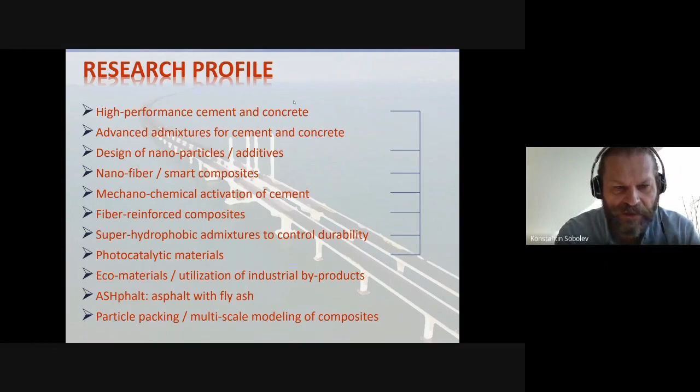Today we'll discuss concrete, and most probably you've seen similar slides earlier today. I just like to briefly mention that we all deal with concrete because it is such a wonderful material, and it is widely used in civil and transportation infrastructure.

Because concrete is such a widely used material, the production and use of Portland cement is also considerably high, and we all are dealing with improvement of this material, because even a small improvement of concrete performance can make a significant impact on environment and significant impact on economics.

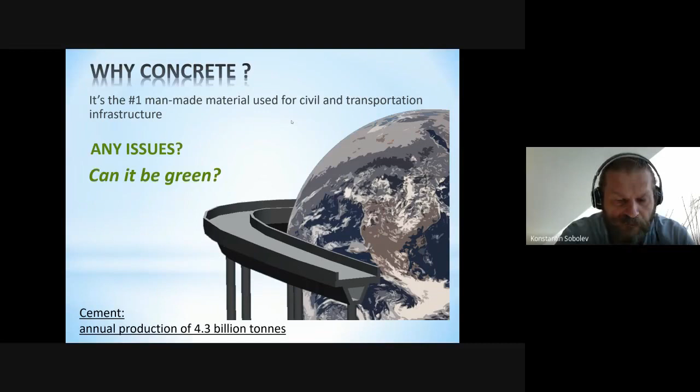The question always comes: do we have any issues with concrete? It's widely used and looks like a convenient material of choice for many applications, but do we have any issues really? Do we know how to use it effectively, and can we do it better? Also, can we produce concrete using green technology, and can we really focus on making it environmentally friendly?

If we look at this chart, very popular in the United States - every year the American Society of Civil Engineers does a study, and this is, I believe, the latest. Maybe there is a new one published recently, but I'm not aware of it. I've been tracking this for maybe the last 10 years at least, or more.

In the United States, our infrastructure rates higher than a D grade. I don't know if you're familiar with the grading system we have in the US - D means a failing grade. Basically, it means you cannot really graduate from your university with a D grade. You need to take the class again, or take the entire program again.

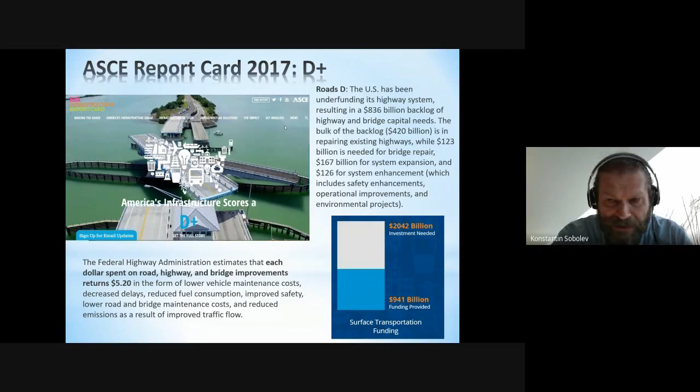So very often we feel that more money is simply required - give us funding and we will build beautiful infrastructure and fix all the problems in construction. This is the approach the Federal Highway Administration takes, thinking they can fix it if they have more money. In reality, it's most probably not sufficient to have just more funds. More knowledge is required.

Some statistics from Wisconsin - I live and work in Wisconsin, which is one of the northern, central-northern states in the United States, bordering Canada, and most probably has the coldest and toughest conditions for concrete exposure.

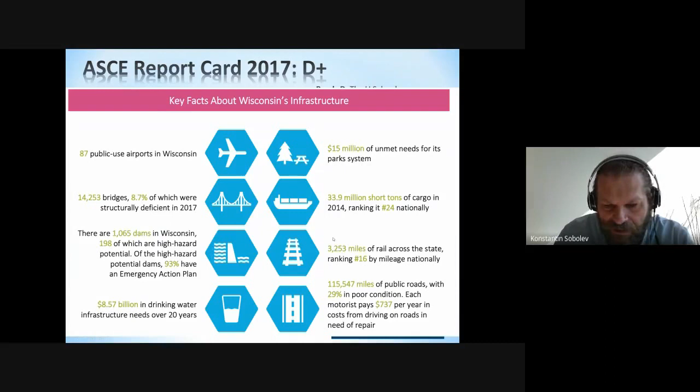You can see that bridges are about 9% structurally deficient, we have about 20% of dams structurally deficient, and if you look at public roads, 30% are in poor condition. So really, a very sad picture - we do have a problem with concrete durability.

If we want to attack concrete durability, we need to understand that concrete is a porous material, so moisture, liquids, ions, and gases can easily pass through the concrete structure if it is not designed to resist such effects.

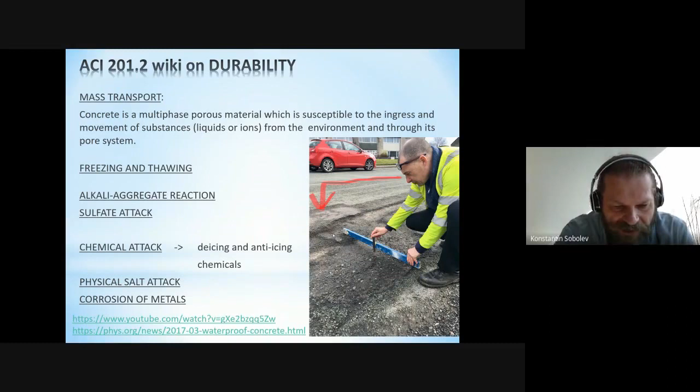As soon as concrete is wet or subjected to flows of fluids, it can be subjected to freezing and thawing failure, can fail because of alkali-aggregate reaction, sulfate attack, and chemical attack - which we often see here in Wisconsin because of use of de-icing and anti-icing chemicals, causing physical salt attack and corrosion of metals. So durability is obviously a great challenge in current state of practice, requiring a better fundamental understanding to do better work on construction sites.

The effect of water-to-cement ratio was already discussed earlier today, and we need to also understand the effect of curing. What we usually know about concrete in the lab is material perfectly cured under laboratory conditions, but in the field we often don't have adequate curing.

Curing is very important to the formation of proper capillary structure and formation of micropores rather than macropores, which are easily penetrated by fluids and cause material failure under environmental exposure. If we think about water-to-cement ratio as a key parameter, having a ratio less than 0.5 will result in better compressive strength, but more importantly, lower permeability - lower capillary porosity and lower permeability. This is our target.

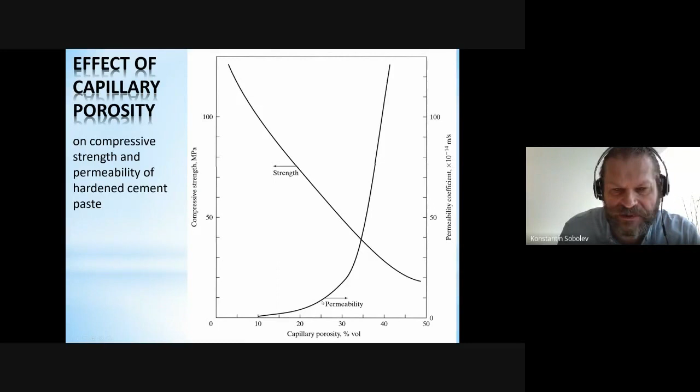Obviously, in the field, curing is a big issue. I ran this experiment back in Mexico when we had a construction project next to our university, and I observed certain temperature and humidity fluctuation. Rainy days and dry sunny days were changing, and I've seen concrete placed in a very important structure without proper curing.

I ran an experiment with my students. We had two types of concrete at 0.45 and 0.6 water to cement ratio, and we tested them at different exposure conditions. For one day, materials were cured in molds under the same conditions, but after one day they were exposed to outdoor exposure, while others were cured in the lab and subjected to moist curing.

What we would expect normally from this concrete at moist curing, if you have a high water to cement ratio, the difference between these two concrete types would be about 100 kilograms per meter cube. In order to get your design compressive strength for concrete at 0.6 water to cement ratio, you really need to produce concrete at water to cement ratio 0.45, meaning use 100 kilograms of cement more to compensate for poor job site conditions.

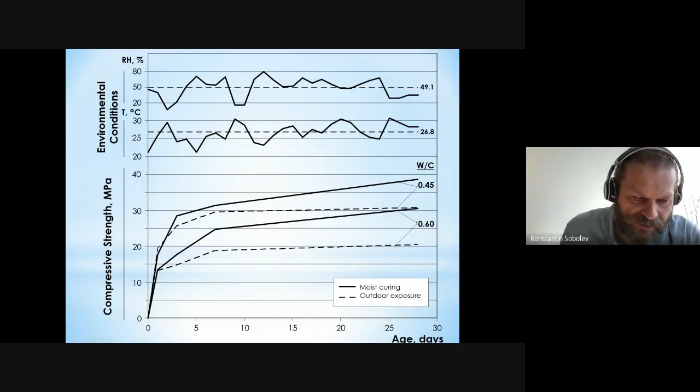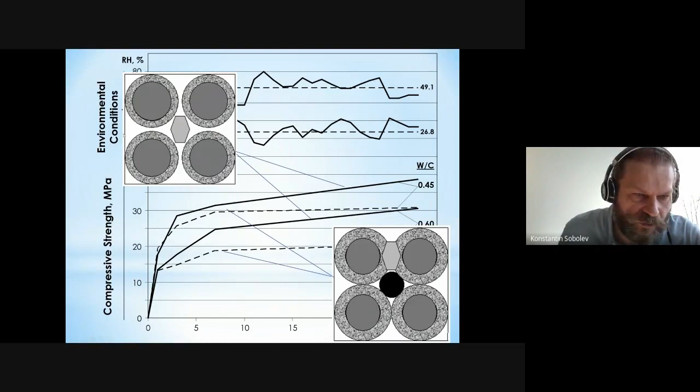Roughly, you can see you lose about 10 megapascal of your compressive strength under such conditions. This is because of rapid drying and poor microstructure, while under perfect moist curing conditions, you form a very beneficial microstructure.

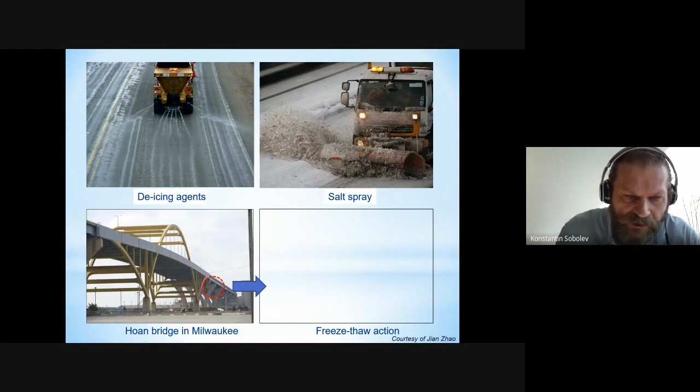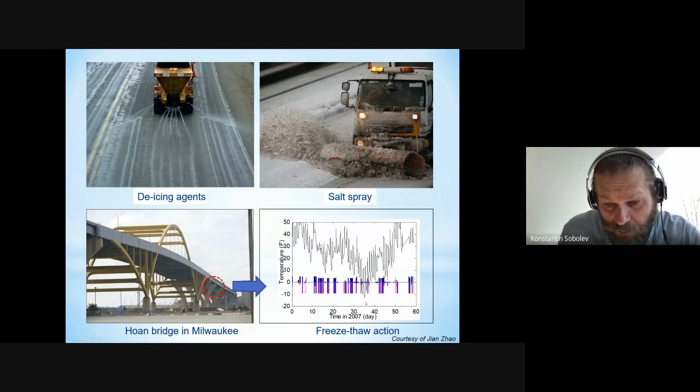And if you apply de-icing chemicals, use salt spray, and have all these de-icing operations, obviously under freezing and thawing cycles, which we have about 50 per year in Wisconsin, you have premature failure of material.

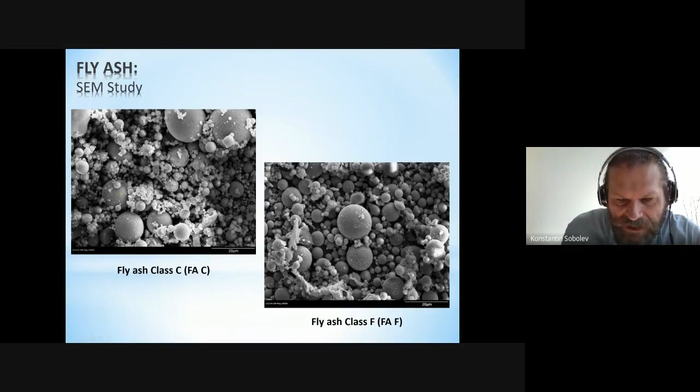In addition to this, concrete is subjected to different forms of mechanical action, especially on pavements. We initiated a research program with the Department of Transportation here in Wisconsin, and we suggested investigating the role of optimal concrete design. We decided to look further into the effects of fly ash, different types of fly ash, Class C and Class F. Class C is high calcium fly ash, and Class F is silicon dioxide rich fly ash.

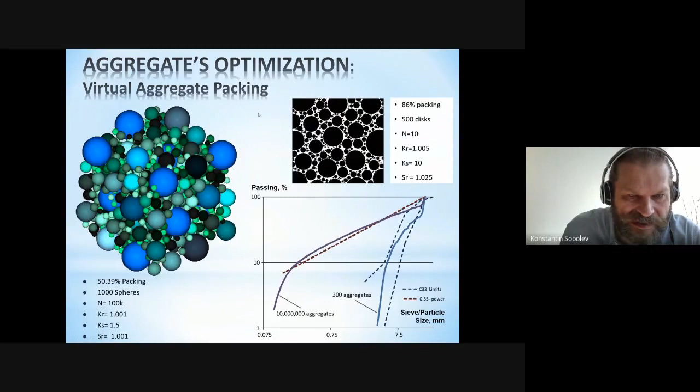We proposed to revisit aggregate packing and aggregate particle size distribution so we have a better structure, and we also proposed to use modern superplasticizers to improve the performance of concrete.

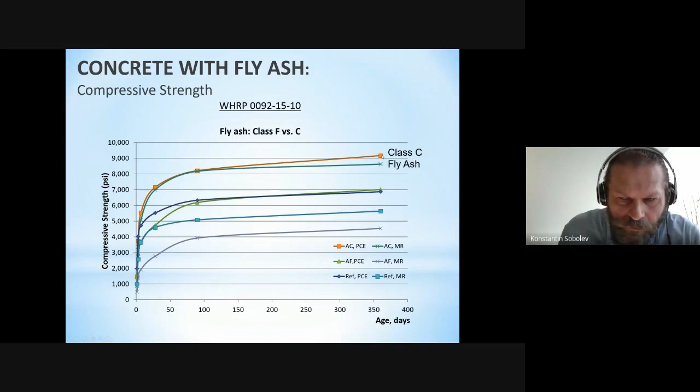If you look at reference concrete, it was considerably improved when we used modern polycarboxylate-based superplasticizer. The Department of Transportation is happy with 4,500 psi concrete, which is roughly 30 megapascal concrete. But under the same conditions, this can be considerably improved if we simply use polycarboxylate superplasticizer, or even further improved with a combination of polycarboxylate superplasticizer and Class C fly ash.

Obviously, strength is not really a big issue. It looks like we know how to handle strength, we know how to improve strength. An important parameter was, of course, the durability.

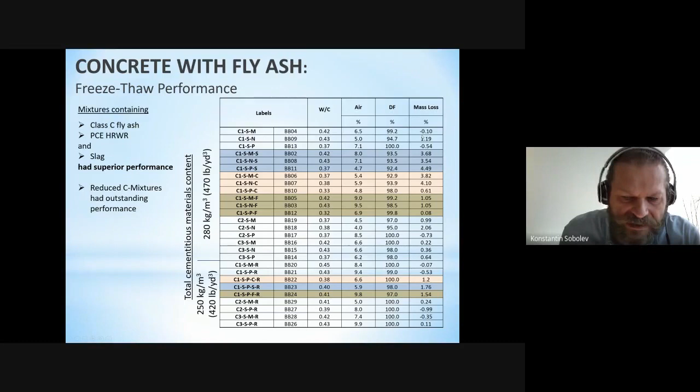If we look deeper at different types of fly ash, strength development can be really boosted with use of polycarboxylate superplasticizer. The Class C fly ash was outperforming Class F fly ash, and even in combinations like 15% Class C and Class F fly ash, we still had relatively good performance, reaching the performance of reference Portland cement concrete.

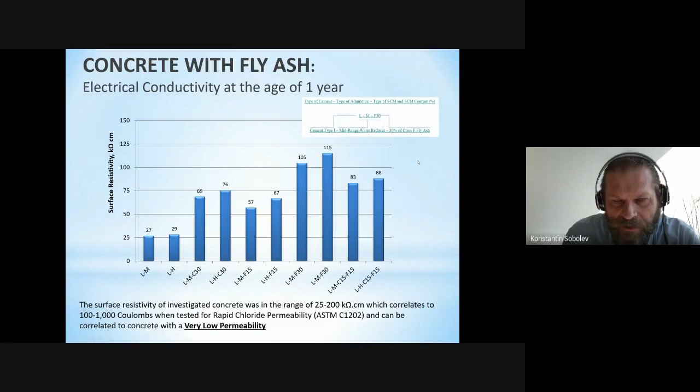Especially at 1 year, we didn't see the difference between these types of concrete. So up to 30% Class C fly ash and 15% Class F, or 15% Class C and Class F, can be used in combination with polycarboxylate superplasticizer. The benefits of using Class F fly ash were producing concrete with very low permeability. Most of these concrete types had very low permeability, but the Class F fly ash based concrete had extremely low permeability.

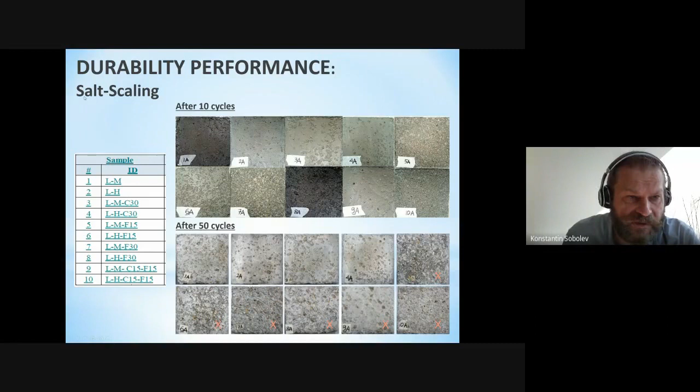If we look for concrete challenges, obviously we know how to tune concrete for strength. We understand the durability at the lab scale. Obviously, we still need to implement it at the industrial scale. We have a better idea about sustainable concrete, how to improve the use of supplementary cementitious materials, and how to reduce Portland cement consumption, energy, and carbon dioxide emissions.

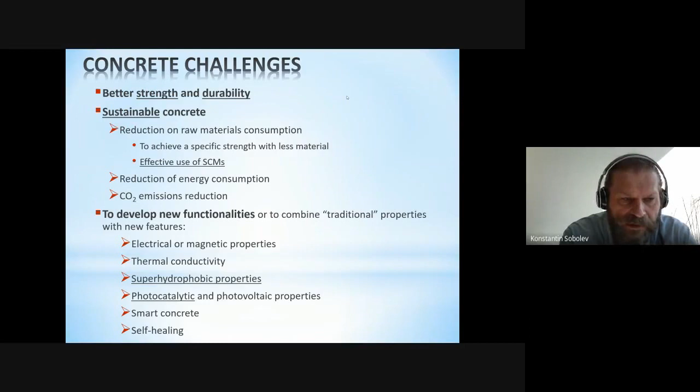But can we do better, really? The goal for future development is to develop new functionalities and new features embedded into conventional concrete material. I won't discuss all the possibilities today, but I'll touch on superhydrophobic properties, photocatalytic properties, and I'll still speak more about nanoparticles and nano-engineered concrete.

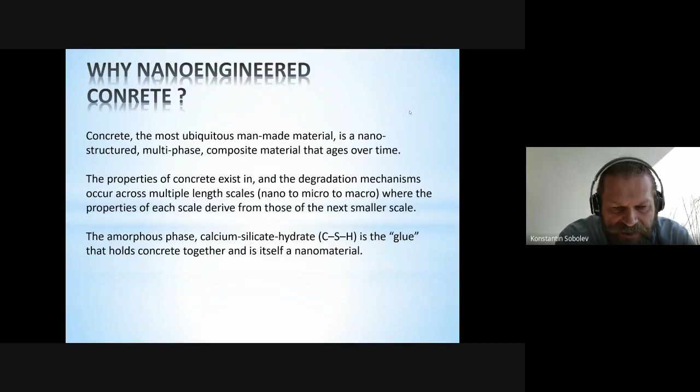If we look at concrete, we understand that properties and degradation mechanisms occur across multiple length scales. The smallest we can now detect is nanoscale, and properties at macro scale can be manipulated by improvements at nanoscale. For example, calcium silicate hydrate, the main building block of concrete hardened cement paste, is a nanomaterial at nanoscale, and this can be detected.

First we had artist renderings for the CSH clusters, and after that we were able to see it with atomic force microscopy. Again, when we speak about nanotechnology and nanoscale, we suggested this type of scale.

This is now an American Concrete Institute approved scale of sizes, which may differ from classical IUPAC classification or classical capillary voids specification. It's basically a very simple metric type description of pore sizes, and not just pore sizes, but dimensions related to concrete technology.

Basically, whatever is less than 100 nanometers and more than 1 nanometer is at nanoscale. And this is where we can really make a considerable improvement of concrete structure.

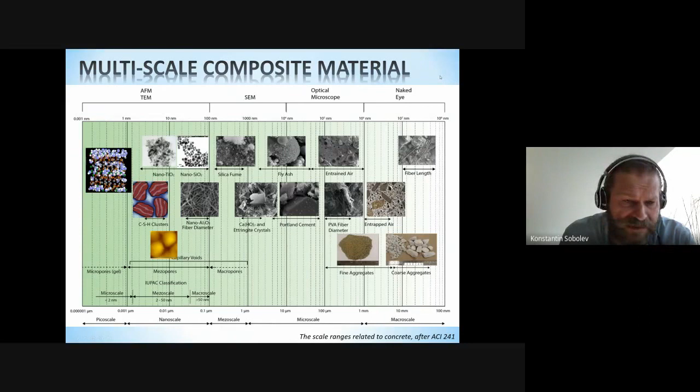How can this be achieved? Well, we can investigate concrete structure at nanoscale, so we can understand it better, and we can improve and fix whatever is wrong at nanoscale. We can produce nanoparticles and use them for improvement of the structure of cement-based materials.

We can use nanosized CSH seeds for accelerated hydration, and we can use nano-dispersed cementitious components. We can have nano-reinforcement, and we can modify surfaces with nanolayers. We have many other opportunities which we're going to discuss today, including how we can be green with nanotechnology.

I think the story of concrete nanotechnology starts, of course, with the instrumentation which we now have available to investigate structure, for example, under the transmission electron microscope.

So we can see smaller elements, and we can produce small elements such as silicon dioxide nanoparticles, nanosilica. Many of us are familiar with silica fume or metakaolin, which were materials that enabled us to produce ultra high performance materials.

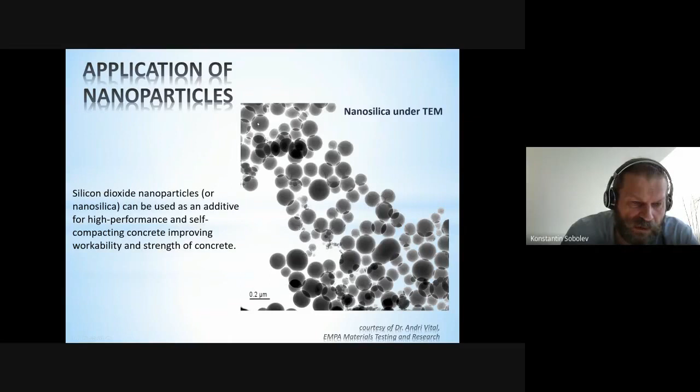But nanoparticles can also be extremely powerful products, used for high performance and self-compacting concrete. If you look at this relatively old diagram, which we proposed back in 2005, the specific surface area and particle size diagram shows that all concrete materials kind of follow this straight line.

If you look at conventional concrete, this is what we can do with a conventional set of aggregates, Portland cement, and potentially fly ash. This is what I was discussing at the very beginning of my talk.

Obviously, when we have available new components like silica fume and metakaolin, we were able to achieve high strength, high performance concrete in a relatively easy way.

Now, when we have smaller components with higher surface area and higher reactivity, we can produce nano-engineered concrete. Nano-engineered concrete is not only high-strength concrete, not only concrete tuned for extreme durability, but also concrete with special properties which we can achieve by incorporating different nano products.

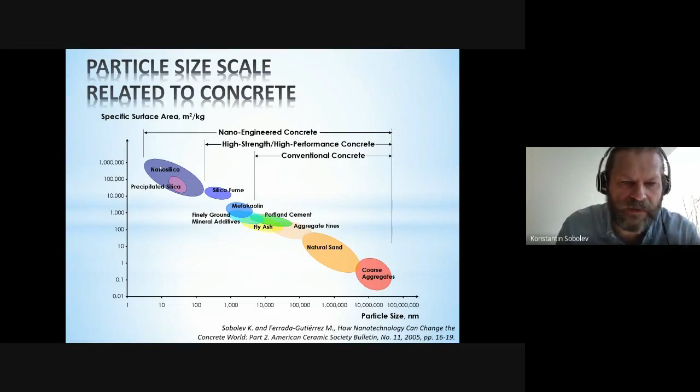So not necessarily nanosilica here, but any other nanomaterial can be used. And the idea was also that when we speak about nanoparticle application, proper dispersion is extremely important, because if nanostructures are not dispersed, if they are present in the form of agglomerates, they're not behaving as nanomaterials themselves.

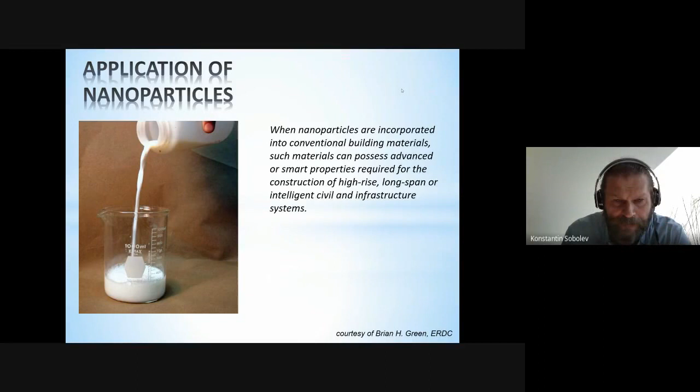They are not really acting as nanomaterials in the complex structure of hydrating Portland cement, so we like to have them dispersed. When we disperse them, it usually happens in industrial conditions. So on the job site, in the lab, we may receive already perfect dispersions of nanoparticles, often in liquid form, looking like a milky substance, like in this picture given to me by Brian Green, who was among the first, together with Mario Collepardi, to use these products in concrete. Obviously, the addition of nanoparticles was studied to improve the mechanical properties.

There is a pioneering study by Antonio Porro and his group from Bilbao. The percentage of nanoparticles here is compared to conventional silica fume, shown as black dots. We know that silica fume starts to be effective most probably after 8%, and can be used in some applications up to 20%. When we compare nanosilica, we see it becomes effective at relatively small dosages, less than 5%, less than 10% for sure.

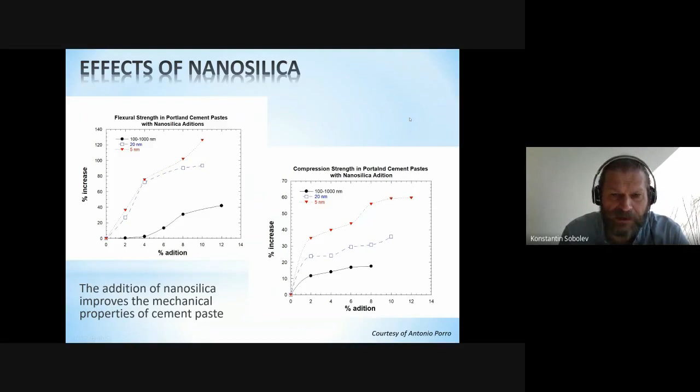If we compare the effect of nanosilica on compressive strength of Portland cement systems, we can see that the enhancement of flexural strength was actually better than the effect on compressive strength. My research group was discussing the use of nanosilica at extremely small dosages—generally less than 1%, and often less than 0.5%. The idea was that nanosilica, as a nanomaterial, should provide considerable improvement at relatively small dosages. Otherwise it may not be effective economically and practically, for different reasons which we're going to discuss now.

When we speak about the production of nanoparticles, there are different methods to produce nanomaterials. I'm not going to cover all of them, but something we tried in the lab is the sol-gel method, which is relatively easy to realize in the lab. You use a precursor, usually TEOS, in an alcohol environment, and you can produce it in acidic or alkaline media. The product you get is nanosilica and alcohol in solution.

As a result of this reaction, you have hydrolysis first, then polymerization, forming a sol—basically a dispersion of nanoparticles in alcohol and water. Removing the alcohol is sometimes challenging, though there are elegant solutions. The path we usually use is to produce a wet gel, then evaporate the solvent to produce a xerogel, and from the xerogel, a raspberry-like structure to produce particles for concrete applications. You can also produce dense ceramics by further sintering, but for concrete applications we'd rather use products as dispersed as possible.

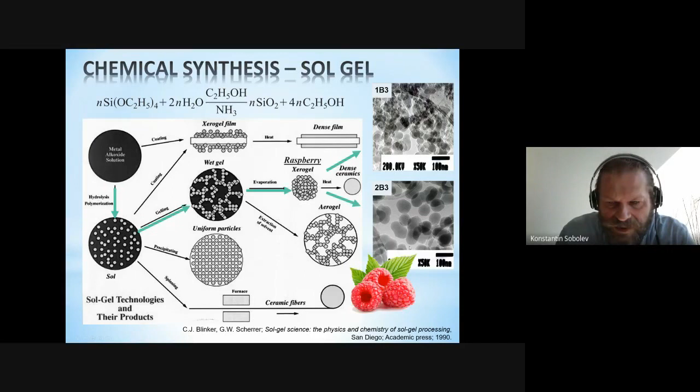We tried xerogels, trying to produce ones that are easily dispersible. By changing the experimental conditions—specifically the water-to-TEOS ratio or ethanol-to-TEOS ratio, and varying the pH from 2 to 9—you can produce particles of different sizes, from larger particles to extremely small ones. Based on our results, both pH values were beneficial for producing the particles. It was important to produce them at the highest dilution rates, so particles were smaller and more easily separable for subsequent application in concrete.

If we compare the structure of nanosilica to silica fume, silica fume is a known amorphous product with 95% or more, typically 98%, silicon dioxide. Nanosilica is 99.99%, almost like chemical-grade amorphous silicon dioxide. So you don't have a crystalline structure, you have a perfect amorphous structure, and they are very difficult to distinguish using simple X-ray diffraction. X-ray diffraction cannot be used to characterize these products.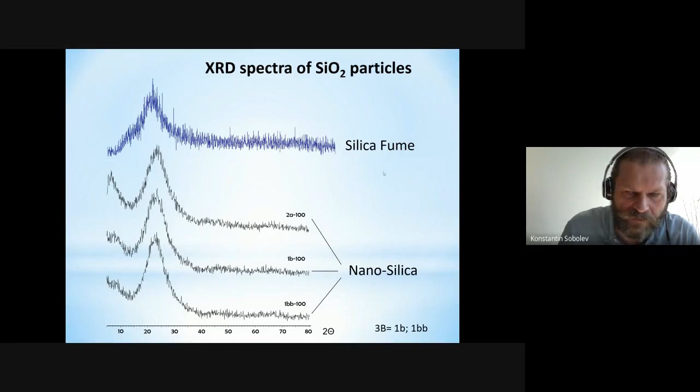With amorphous materials, we are concerned with particle size, since the composition is pretty well known. As I mentioned before, dispersion is extremely important.

High-speed mixing and rotor stator type geometry was used to disperse nanomaterials, but sometimes it doesn't work extremely well. Ultrasonic dispersion is commonly used, and dispersion times can be relatively long, potentially 2 to 3 hours. Not all material is dispersed continuously, so you need some sort of circulation. Cooling is important because higher temperatures may result in agglomeration of the nanomaterials, so instead of dispersion you may initiate some sort of reaction. You need to be very careful in dispersion. In my research group, we use a combination of rotor stator and ultrasonification together.

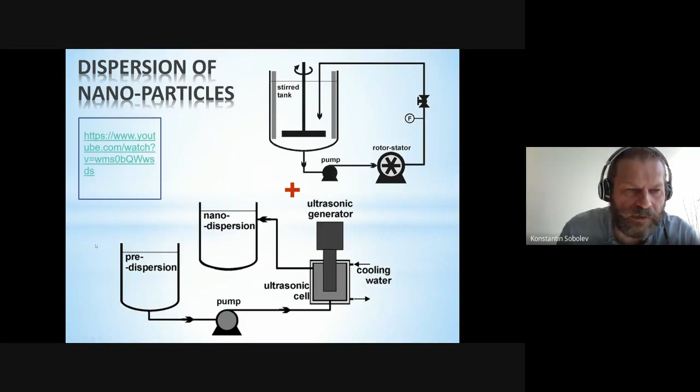This works well for larger batches when we need to produce, say, 1 liter of dispersion, and it worked well for us. If you have time, you can watch a video on YouTube on nanoparticle dispersion, but I'll move on to save time.

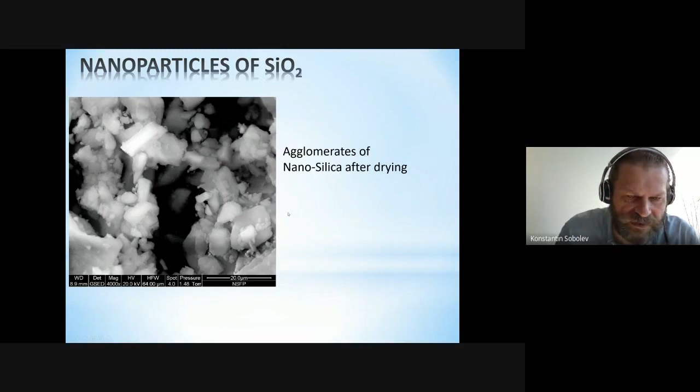With nanosilica produced by the sol-gel method, xerogel results in chunks which are relatively large particles, but if you zoom in, those are agglomerates of nanoparticles. Once you start using ultrasonification, you can see the angular particles becoming more round. Due to cavitation, the agglomerates are destroyed and smaller particles are released.

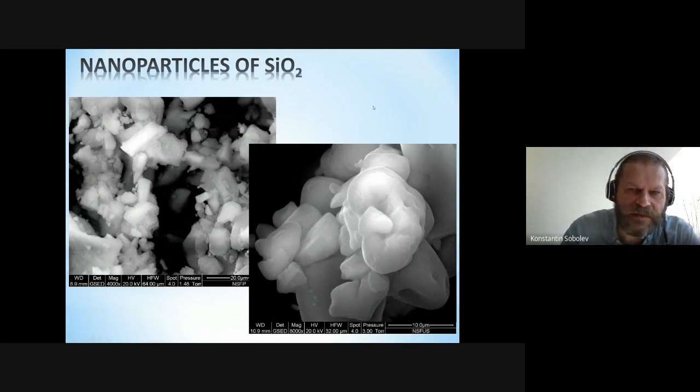Still, it is challenging to disperse the xerogels. Industry now offers very good products produced using relatively cheap methods, so it's relatively easy nowadays to receive the product. For example, in the past, Cembinder 8 was used by Mario Collepardi and Brian Green, but that's already history, and we now have newer products which may have better reactivity and better effect on compressive strengths.

If we compare the two different particles, smaller particles may affect the workability, so you may need to work with superplasticizer to adjust the workability, but usually this can be easily done. Using these nanoparticles, Cembinder 50 can enhance compressive strengths, including early compressive strengths and 28-day compressive strengths. 2% of these nanoparticles works better than 0.5%.

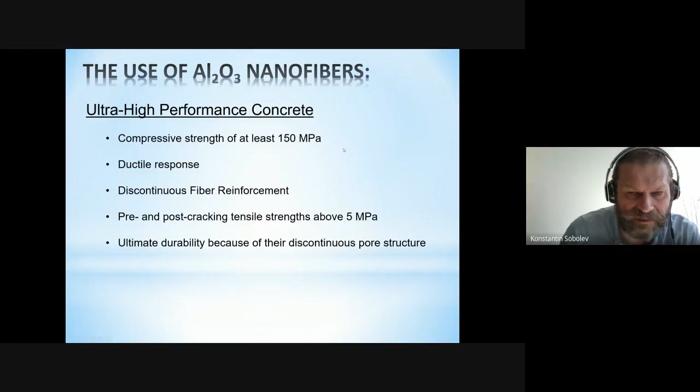It should have a ductile response, realized with discontinuous fiber reinforcement. An important parameter is pre- and post-cracking tensile strength of more than 5 megapascal, and it's considered to have ultimate durability because of their discontinuous pore structure. So usually durability of this material is not really a question, but we focus on mechanical performance. And the question is, 150 megapascal is quite challenging to produce.

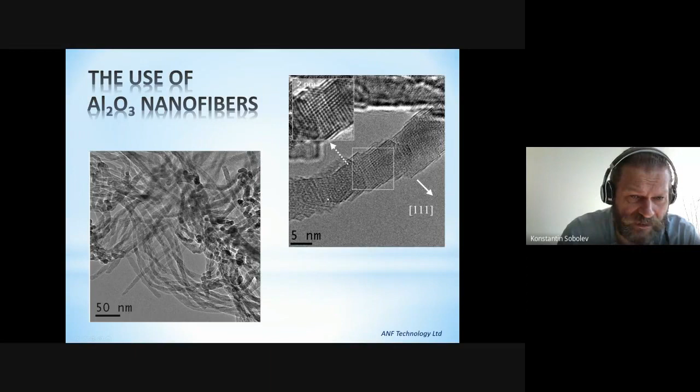So we decided to check the opportunity with nanofibers. You can see that nano-alumina fibers are relatively small in diameter but still very long. The initial fibers have a diameter on the order of 5 to 10 nanometers—this is transmission electron microscopy on the right—and the initial length is actually about 50 millimeters as received.

Because of the dispersion process, we can achieve good dispersion of these products—they are easily dispersible. When we incorporate them into Portland cement systems, we see considerable enhancement of heat of hydration, though we still observe some delays in heat of hydration. This is related to the processing technology, because when we disperse the nanofibers, some of the superplasticizer is damaged due to ultrasonification, causing the delay in hydration. But you can see that peak heat flows are really improved.

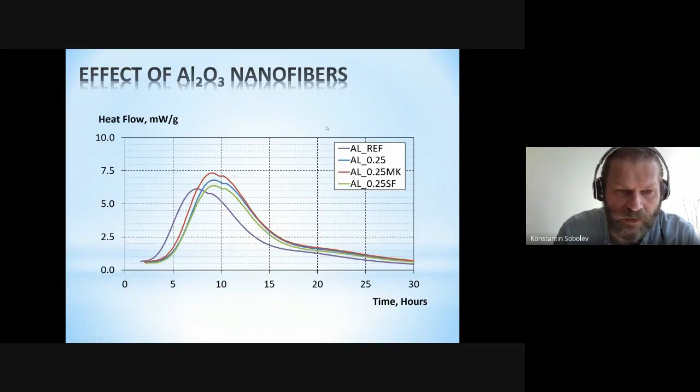Yes, we had some improvement of early strength, but also we had improvement of 28-day strength. When we discussed using the fibers, we realized a better cementitious matrix is required. So using small quantities of silica fume or metakaolin, usually about 1%, is extremely useful for proper incorporation of nanoalumina fibers.

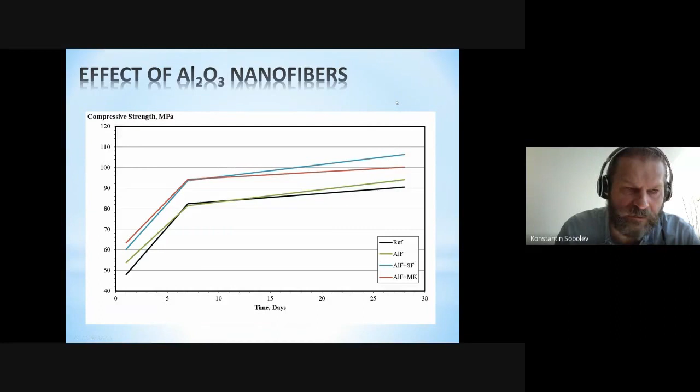Normally for ultra high performance concrete, compressive strength of 145 megapascal can be relatively easily achieved by Portland cement systems using silica fume. Going over 150, this is kind of the barrier which requires careful selection of superplasticizer and type of cement. This becomes a challenge, which we overcome simply with addition of nanoalumina fibers, and also use of metakaolin and silica fume.

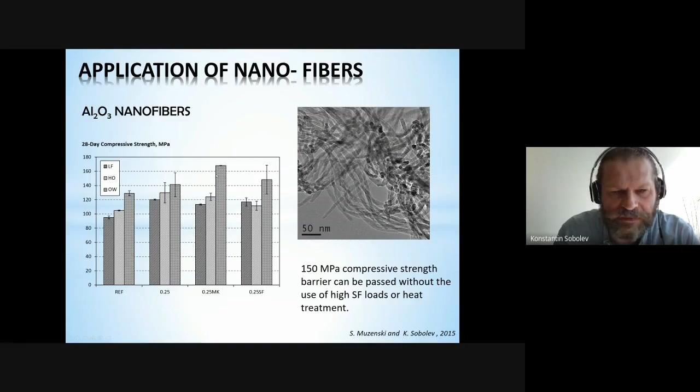In this way, we can easily produce statistically higher strengths of more than 150 megapascal, relatively easily. So you can see that such high strength, ultra high strength cementitious matrices are useful for ultra high performance concrete, and can be easily combined with different types of fibers.

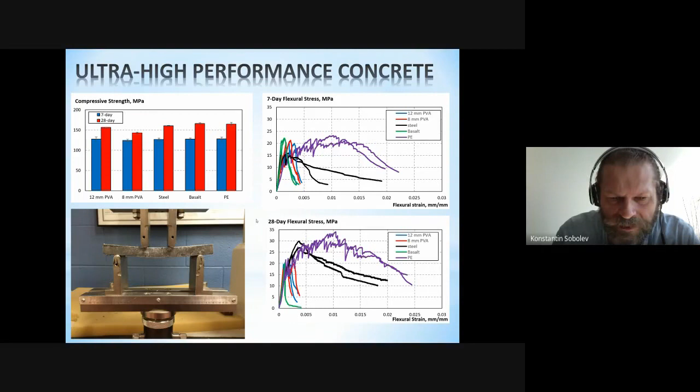Obviously, polyvinyl alcohol fibers are very popular, but if you look for ductility, high density polyethylene fibers are the best, which you can see from the stress strain diagrams for 7 days and 28 days. Steel fibers work extremely well compared with polyvinyl alcohol fibers, but high density polyethylene really helps improve the response of this material and produce an outstanding product.

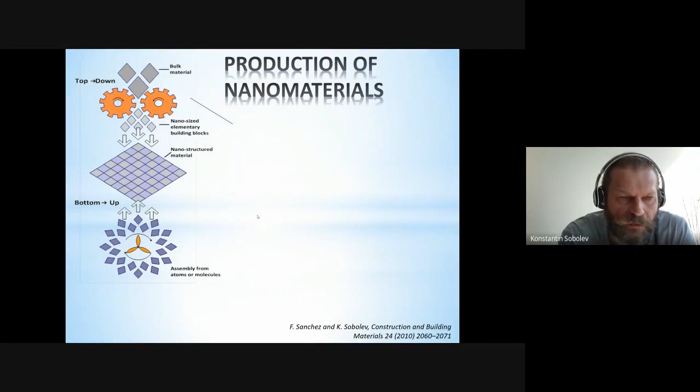Let's discuss briefly the production of nanomaterials again. We covered nanosilica, nanoalumina fibers, and briefly the sol-gel method. Can we do a better processing and produce nanomaterials from available products in an easier way? Can we use a top-down approach to manufacture nanomaterials, using mechano-chemical activation to induce dissolution of the minerals available in Portland cement?

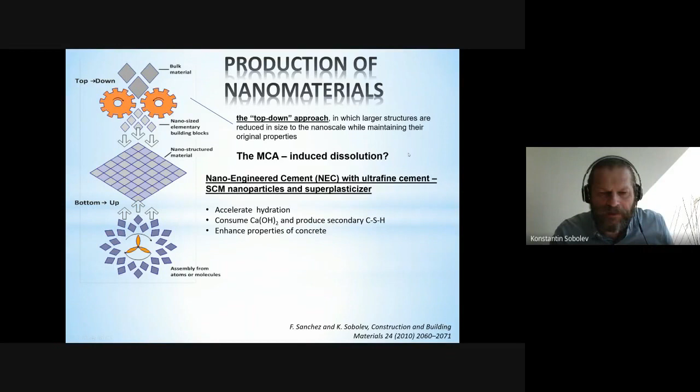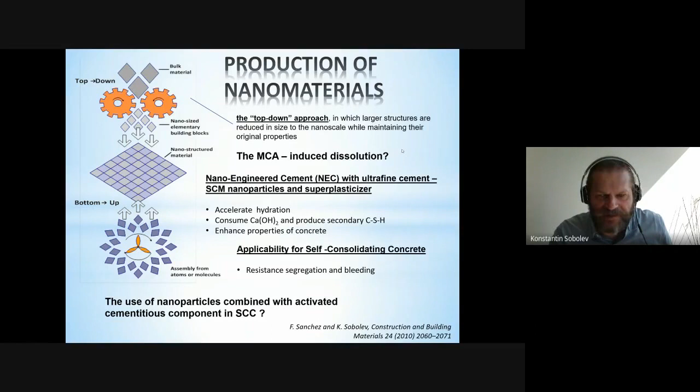These products can be used for self-consolidating concrete, and we can have a relatively inexpensive final product. This was a concept I proposed long ago, but I'm only now close to realizing it. Basically, the concept is to have a Portland cement component ultra-finely dispersed in the system, combined with mineral additives, so the resulting product would have very little Portland cement in its structure, but all the properties would be at the levels we'd expect for classical Portland cement systems.

This is possible with CSH seed. If you have a CSH seed incorporated, you can have a better structure than you would with sol-gel nanoparticles alone. Nanoparticles participate in the reaction, but CSH seeds are really the products which have better acceleration and better structure filling properties, and can act as what I call super glue, even working with less reactive particles of supplementary cementitious materials.

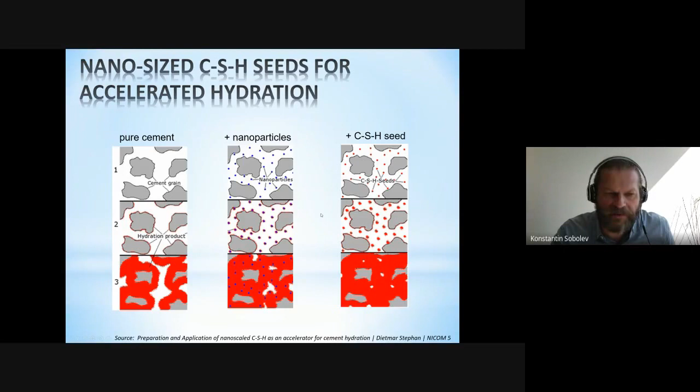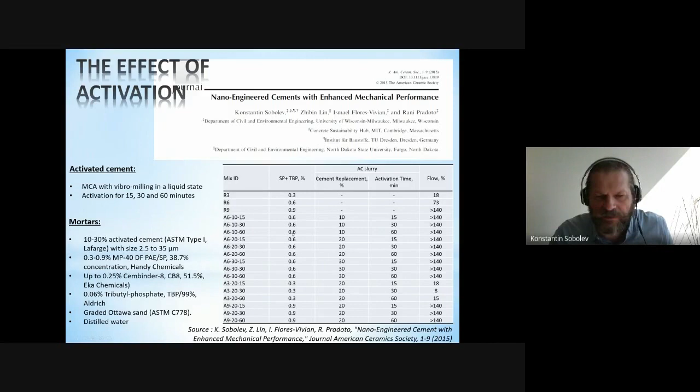To prove this, we ran an experiment to produce a CSH nanoseed, or hydrated cement products, using an experimental program. If someone is interested, you can look at this paper published back in 2015. We used different activation times and different cement replacement with activated cement slurries. Most of the compositions were extremely fluid, and we also used superplasticizer to produce the activated material.

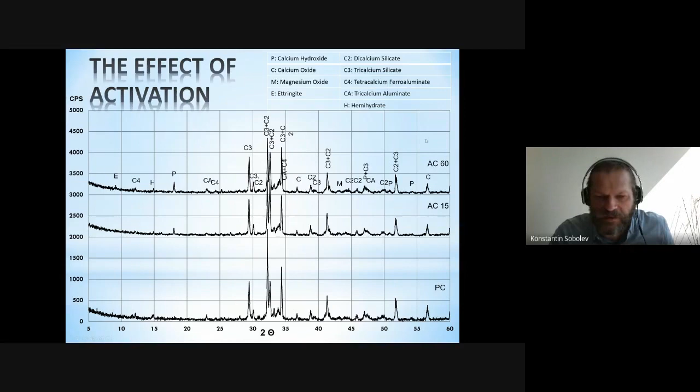With mechano-chemical activation, the degree of hydration considerably increases, and after 60 minutes you can have considerable volumes of hydration products. You can see Portlandite and ettringite appearing, and the main peaks of C3S and C2S are really reduced after 60 minutes. So obviously Portland cement can be used as a precursor for nanoseed production.

Looking at mechanical performance, we had different quantities of activated product and different activation times. We found that even small activation time and a relatively small quantity of supplementary cement substitution with activated cement results in considerable improvement of compressive strength. Compared to a reference material of the same composition, referring to 28 days, the same considerable improvement can be reached in 1 day as well.

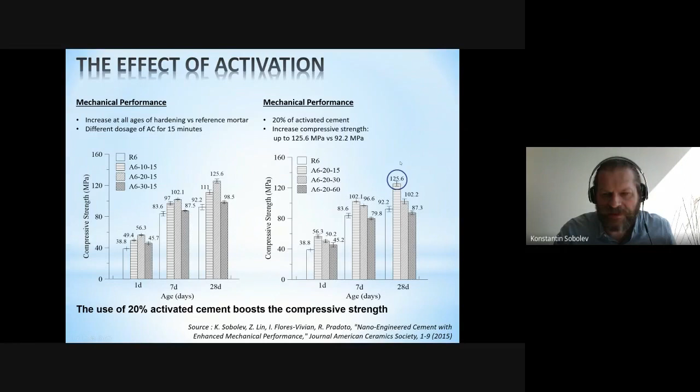The improvement for the same exactly composition, but again, some portion of this cement was processed for production of nanomaterial, nano-seed material. We have considerable improvement of compressive strength. This is a big deal because we don't use silica fume here. We use super plasticizer, and we use a very small quantity of nanosilica for activation, just as a viscosity modifying admixture. So this is considerable improvement which we can use for production of self-consolidating concrete.

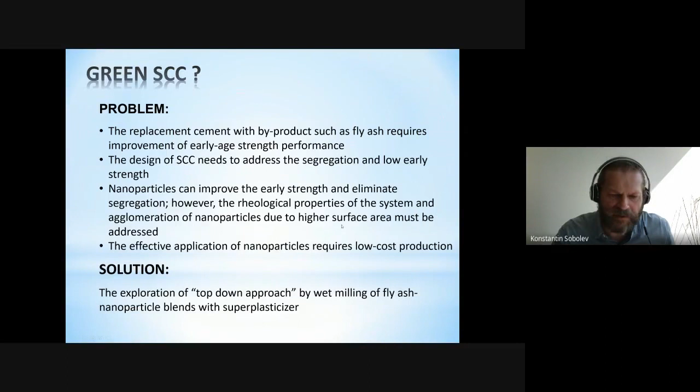Can we do better? Can we produce green self-consolidating concrete and try to use class F fly ash as a precursor? Obviously, wet milling of fly ash nanoparticle blends with super plasticizer can be realized. And we ran a preliminary experiment with inert class F fly ash for 3 hours. You can see that you can really have effective wet milling and strength improvement with class F fly ash as well.

But the major improvements were expected with class C, which is suitable as a precursor for formation of beneficial structures during mechanochemical activation. Again, we tried 20% of activated material, same as Portland cement, and we activated it for an optimal time of 3 hours. And all the materials were processed and produced. Mortars were produced at a water to cement ratio of 0.3.

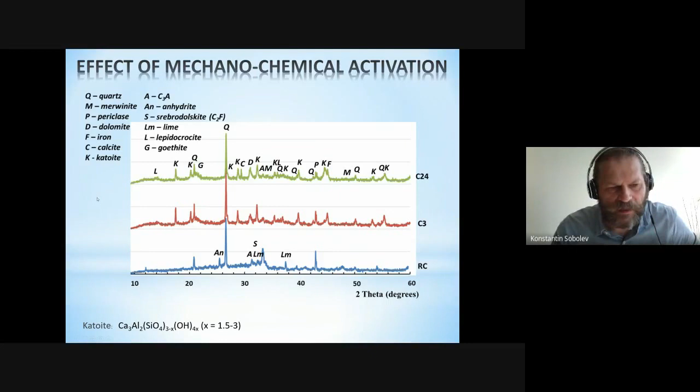Upon activation, what we realized is that we have formation of, even after 3 hours of activated cement, the formation of calcium aluminosilicates such as katoite products after 3-hour hydration. So this can be easily detected, and those products were actually the main acting products of the nanomaterials accelerating the hydration process of the system with activated class C fly ash.

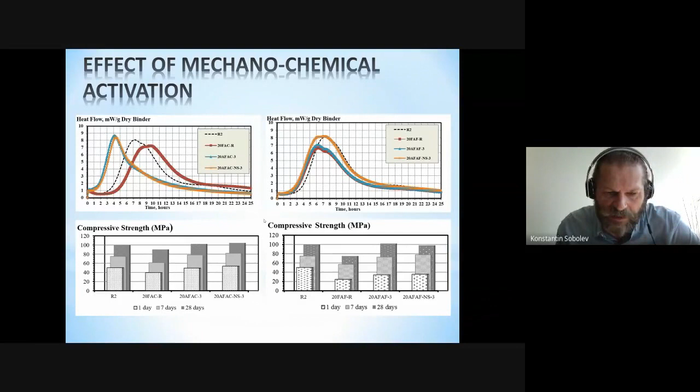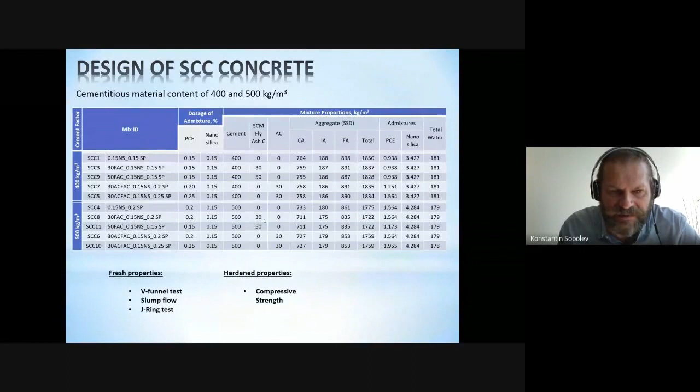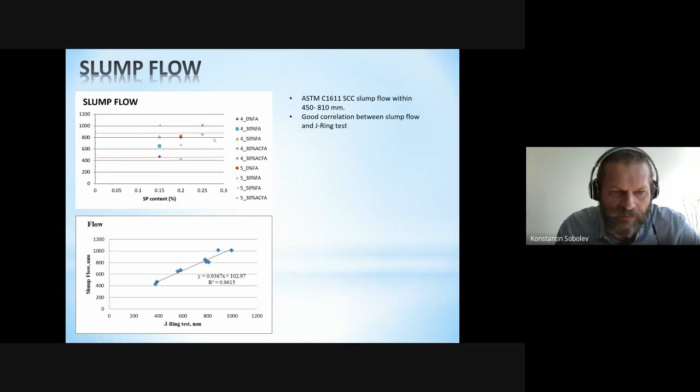Obviously, application of this material in self-consolidating concrete was beneficial. So we ran an experimental program with two series with 400 kilograms per meter cube and 500 kilograms per meter cube of cementitious materials. And we had excellent flow properties. We measured that, and this is the range for slump flow, and we had an excellent response.

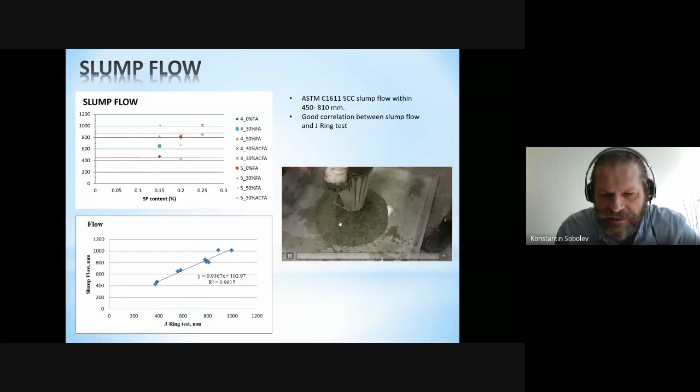I have maybe 10 minutes left, and I'll try to briefly cover other aspects of nanotechnology in concrete which we are really developing. One is related to superhydrophobicity and enhancement of durability. Obviously, if we want to improve durability and have better concrete, we need to find ways to control water ingress. And normally, sealing the surface is not really a good option. So making the surface hydrophobic was really working well, and 3D volume hydrophobization is something which is ideal to achieve.

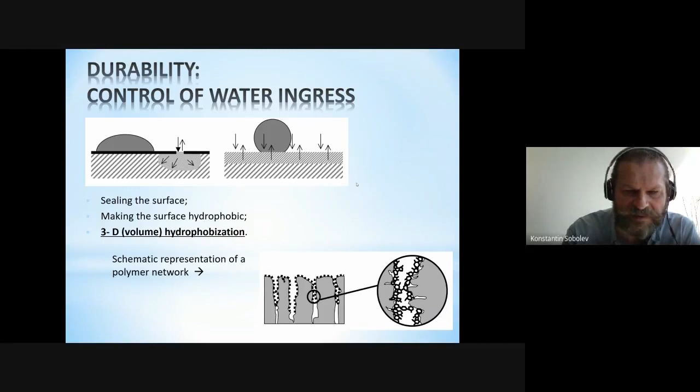So how to do it, let's discuss this. Nature can help us understand surface phenomena, and nature can help us engineer and design superhydrophobic surfaces. If we analyze the lotus leaf effect, we can see it's realized by forming spikes on the surface, spikes of the size of 50 to 100 nanometers.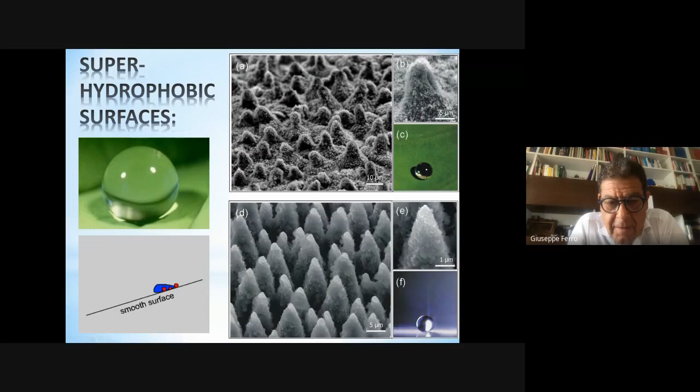Konstantin - yes, sorry, because we are going long. So how long is your presentation? I said 10 minutes, 7 minutes now left. Oh, other 7 minutes? Okay. Yeah, I was planning for 1 hour. Okay, sorry, I'll be done quickly now.

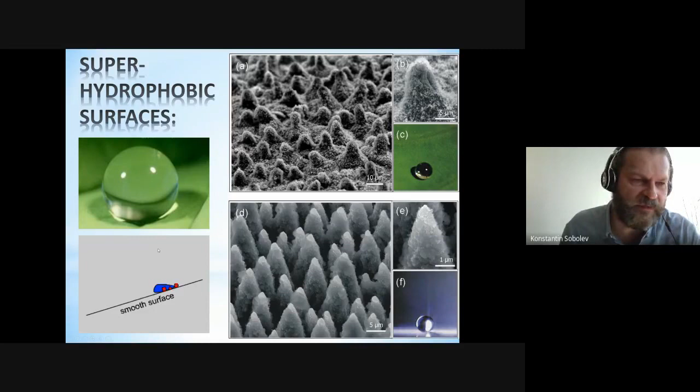There are a couple more slides. Again, if we can mimic the structure of lotus leaf, we can produce superhydrophobic structures.

Classical concrete is hydrophilic. It absorbs water and has a very low contact angle, so water easily spreads on the surface. The classical hydrophobic surface has a contact angle of more than 90 degrees, and usually it's impossible to improve it just by surface modification with a hydrophobic agent.

Superhydrophobic surface has a contact angle of 150 degrees and very low roll-off angle, which is what we usually observe on lotus leaf. We offered a new definition: over-hydrophobic surface between 120 and 150 degrees, which is easily realizable in concrete.

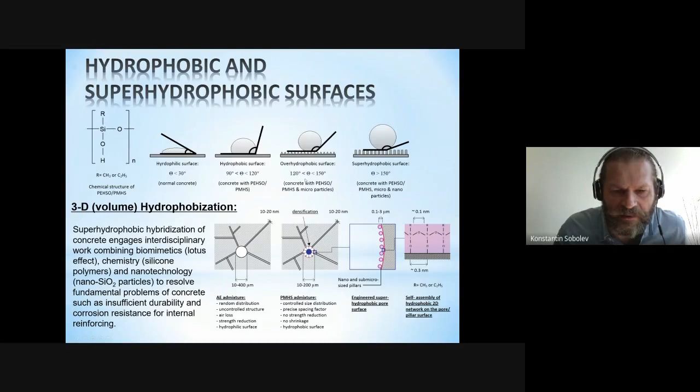3D volume hydrophobization can also be realized with the proposed idea. Basically, we incorporate polyethyl hydrosiloxane agents, which can provide a chemical bond with any silicon structure or silica aluminate structures, and we also incorporate nanoparticles or nanostructures into the surface.

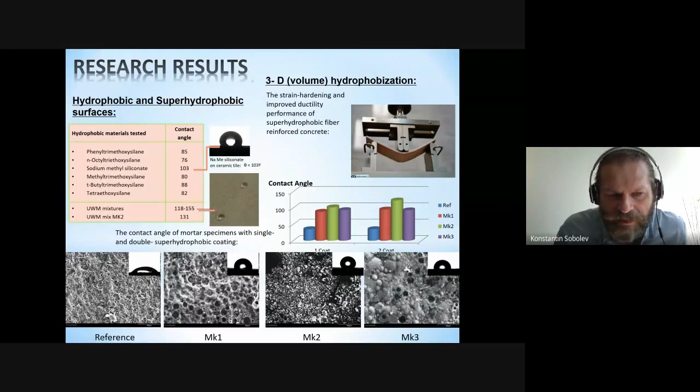Those can be designed to have a sort of particle deposition, so we can control the roughness there, and with roughness we can control the surface. You can see how the structure is designed with particles.

So we have a test for contact angle, and you can see the droplet is jumping off the surface and it rolls off, so the rolling off angle is very close to 0. We can engineer this type of surface.

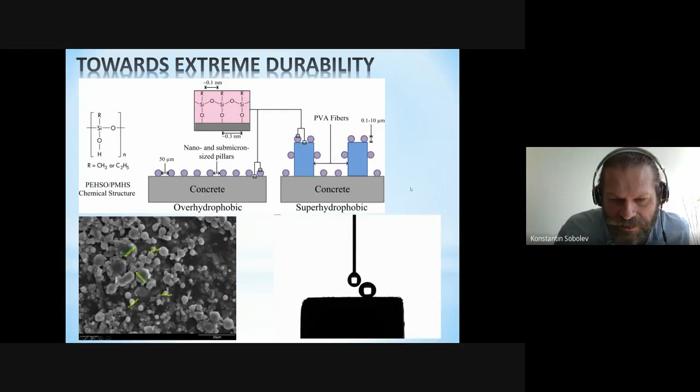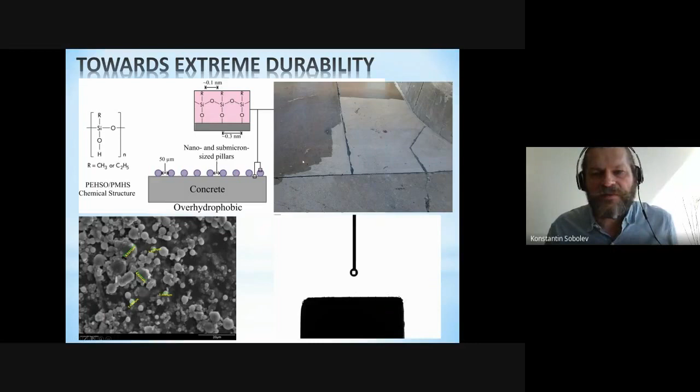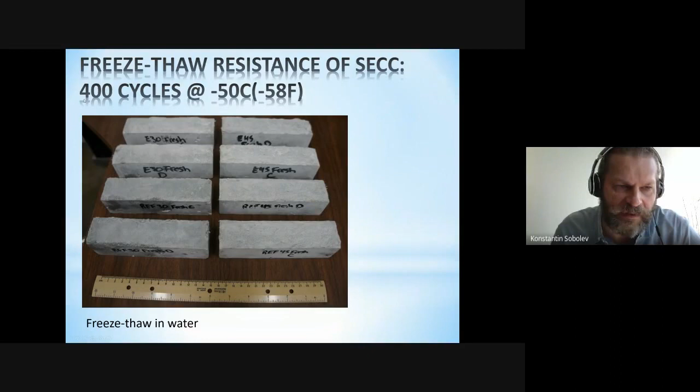When we apply them on concrete, you can see wet concrete around this treated patch, and the treated patch remains dry all the time, but the surrounding concrete is wet and really subjected to failure. When we tested this concrete for freezing and thawing, we did 400 cycles at -50°C, which is extremely low testing temperature, and we demonstrated that performance can be considerably improved in terms of freeze-thaw and salt scaling.

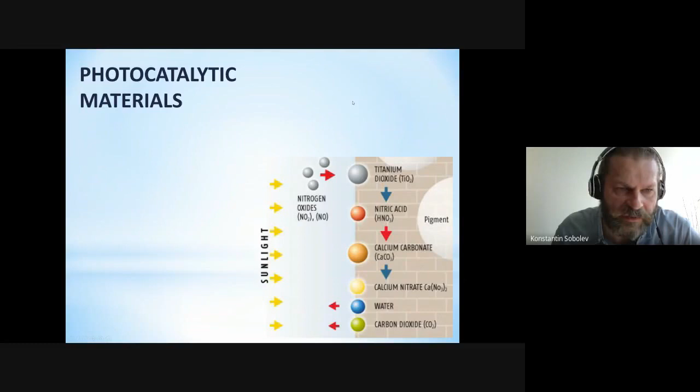We supply NOx gas into the chamber, and we have a UV lamp which is imitating our sun radiation, and we can check the conversion of NO depending on concentration, and also calculate abatement, NO abatement for specific conditions.

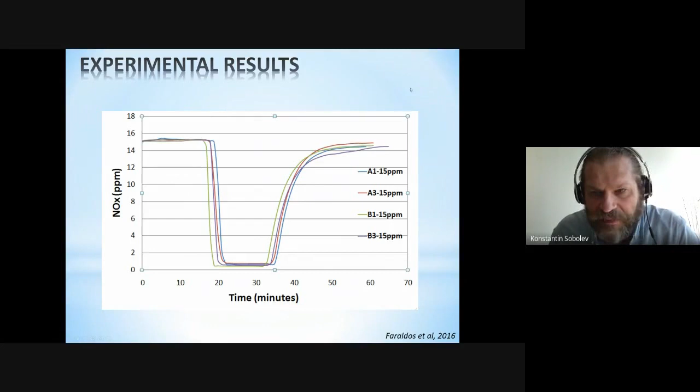The compositions are very effective at 15 ppm as well, an extremely high concentration more like industrial gas, and can be used for other depolluting applications.

This is an example where a similar coating was applied in Arizona. After a number of years, it was still performing well.

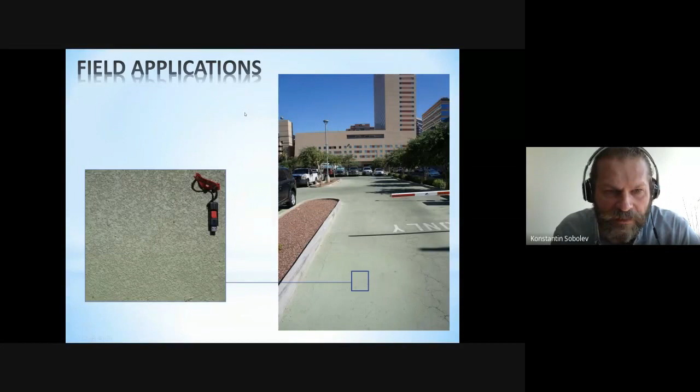We had a project involving photocatalytic concrete and pervious concrete as a combination.